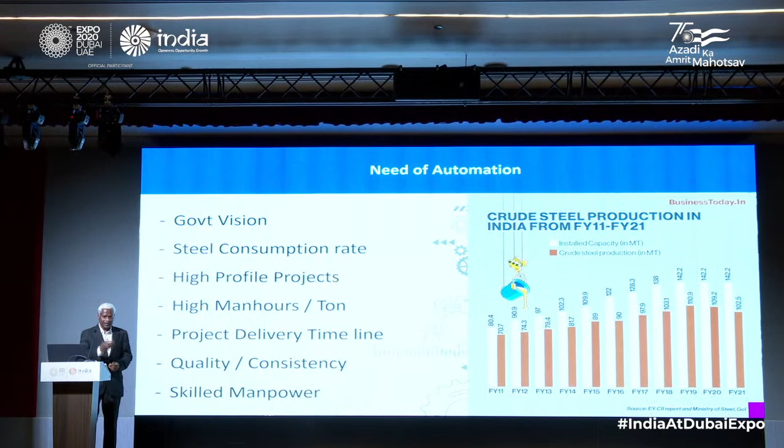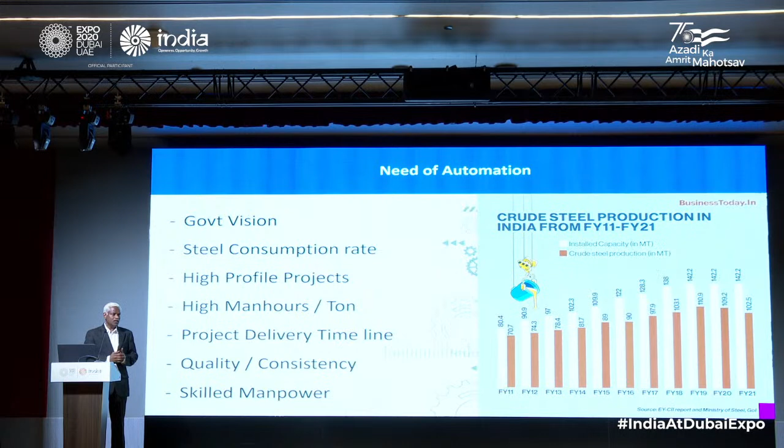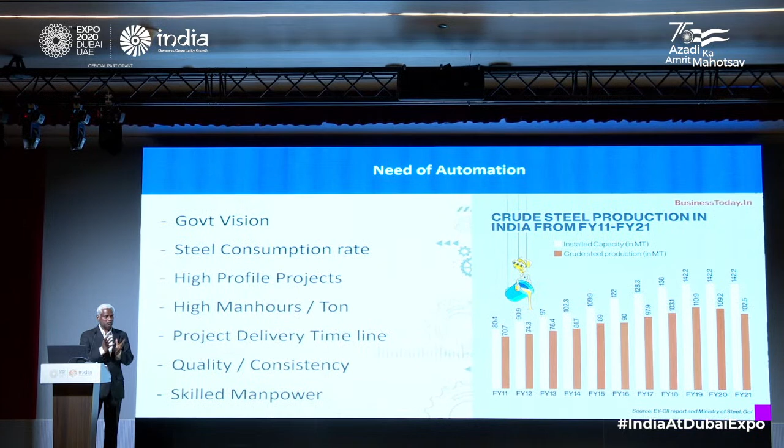As far as the need of automation for the steel fabrication industry in India is concerned, the first thing which comes to mind is what Sri V.R. Sarma mentioned in detail about the trend of the steel fabrication industry in India. We are going towards bigger growth, and we need a lot of value addition and energy conservative programs, which will help us in development.

The first thing is the government vision. Right now we are talking about a current GDP of around 2.85 trillion dollars, and by 2025 we are targeting 5.5 trillion dollars, with a GDP target of 8.4 trillion by 2030. This is an ambitious goal set by our central government.

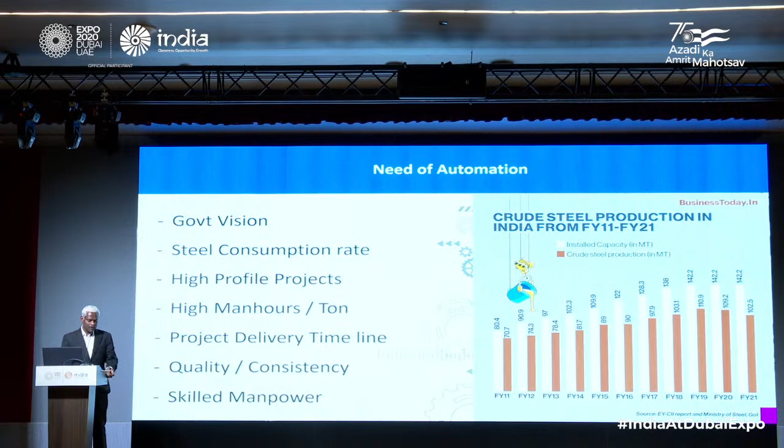To reach this ambitious goal, the steel industry is going to be a major contributor, like a main pillar of major infrastructure projects.

As far as the steel fabrication industry and steel production in India is concerned, the current consumption rate is around 118 million tons per annum, based on 2021-2022 statistics. We are expected to reach a target of 300 million tons by the year 2030, which means we need to more than 1.5 times the production capacity. So this is one of the cases for the need of automation.

In India, we are right now undertaking a lot of high profile projects. As you might have noticed during the recent budget, the Indian Union government has introduced a lot of big projects, which is a big scope for the steel fabrication industry - highways, bridges, railway projects. I can even take the example of the bullet train. If you consider the bullet train project itself, between two stations we are talking about a steel volume of 20,000 metric tons involved.

We are talking about 14 stations between Ahmedabad and Mumbai - that's just one single project. Likewise, there are several other major high profile projects that are going to contribute to the GDP of 8.5 trillion by 2030 and 300 million tons of steel by 2030. Considering these high profile projects, we are talking about hundreds of thousands of steel fabrication activities going to be involved in India in the coming years. So that was one of the reasons we need to look into automation.

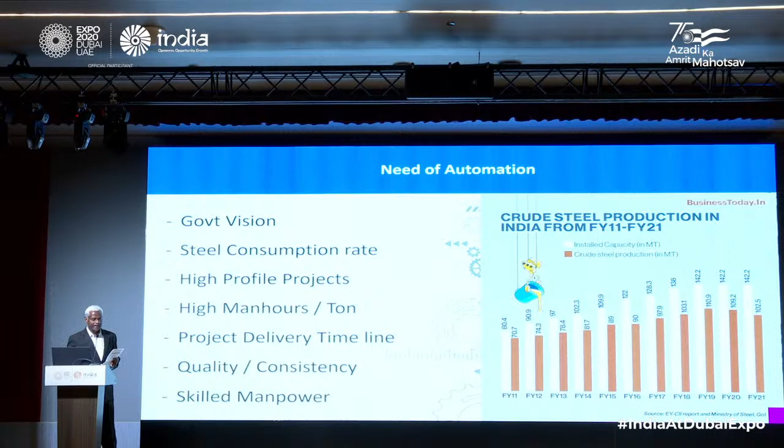For these reasons, I propose that we need automation in place so it can eliminate human involvement, fix human errors, increase quality, increase production rate, and reduce lead time.

The next thing I want to discuss is the current state of automation in India and the opportunity for investment from investors in UAE as well as India. Based on my recent conversations with friends and project managers from reputed construction companies, the current level of automation is very low compared to developed countries, which means there's still a big scope. As far as fabrication is concerned, we can invite the whole world to invest in automation in India, which is a big opportunity.

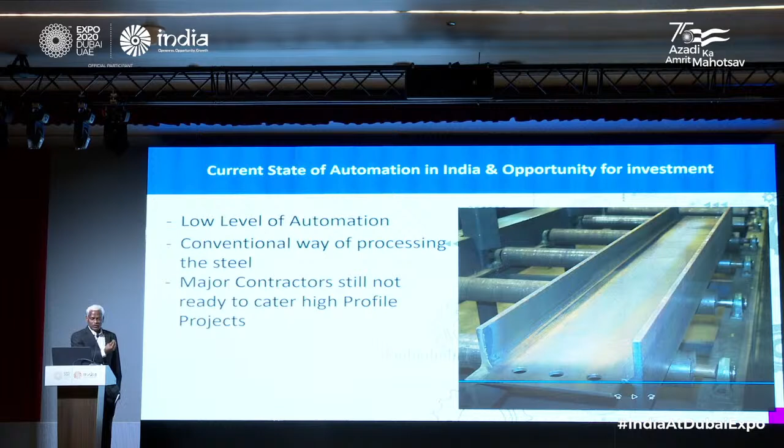To process this one single beam the conventional way, even with a magnetic drill and manual coping, it's going to take a couple of hours, maybe 120 minutes. The same thing, if automated through a single process, single stage machine, we could execute it in less than 5 minutes. You can see the difference: 5 minutes versus 120 minutes. That's a huge difference, and this is what developed countries are following today.

So let's see the automation solutions. We cannot single-handedly figure out one single item. We need to see automation as a wholesome approach. It's supposed to start from the concept, to the engineering, to the procurement, to the fabrication, logistics, installation, and we should also give a thought about the overall management of the project.

When I say engineering, right now if I'm talking about producing 1,000 tons of steel, we may need to pass through thousands of drawings. Right now we may be developing a drawing using AutoCAD, and then it goes through a PDF or a printed page, and it goes to the fabricators. Which means each time we need to cross-reference several detailed documentation before sending to the machine. Again, we need to create a separate part program to send to the machine to prefabricate the material.

Through using 3D modeling and CAD/CAM software and the flexibility of this software, we could create the fabrication drawing, detailing drawing from the 3D model easily and send to the fabricators. Also to the machine, we can directly import the drawing files from the 3D models, whether it's Tekla or any other 3D model. We can send directly from the 3D model to the machines. The machine has the capability to read the drawings from the 3D models and execute the job, which means we are completely avoiding human intervention in between the process, which means we are avoiding human error.

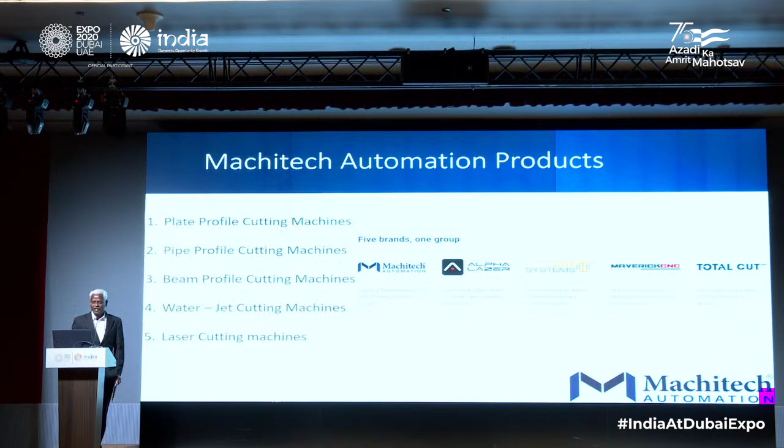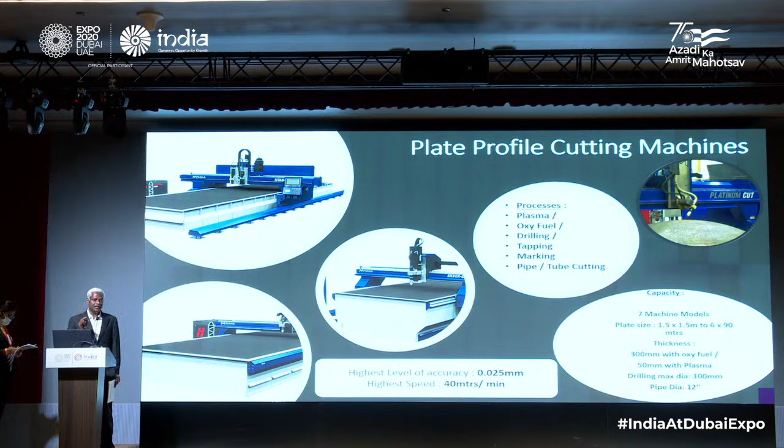The first one I want to briefly touch upon is the plate profile cutting machine. We have a complete range starting from 1.5 meter by 1.5 meter, up to a size like 6 meter by 90 meters, and even customized sizes. These machines are available for processes like plasma, oxyfuel, drilling, tapping, marking, as well as pipe and tube cutting. We achieve an accuracy of 0.025 mm at the highest speed of 40 meters per minute, making these highly advanced machines in the industry today.

The next one is the pipe profile cutting machine. These process circular pipes up to a diameter of 48 inches, for lengths of 6 or 12 meters, and even customized sizes. These machines are available with plasma, oxyfuel, and marking processes. Again, the accuracy level is 0.025 mm at a speed of 40 meters per minute.

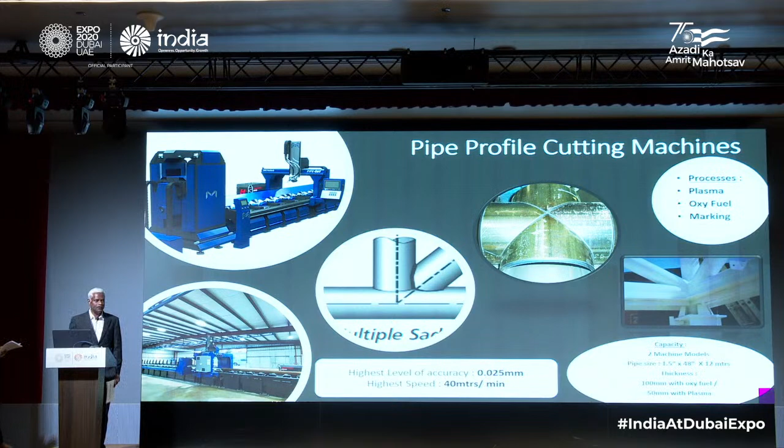The next one is the robotic beam profile cutting machine. With this single machine, we can process multiple materials like beam, square tube, rectangular tube, angles, channels, circular pipes, flat bar, and bulb bar. This machine in reality replaces several conventional machines like drilling, bandsaw, angle line, plate processing, and marking machines. So instead of 5-6 machines, we use one single machine which completely automates the whole process.

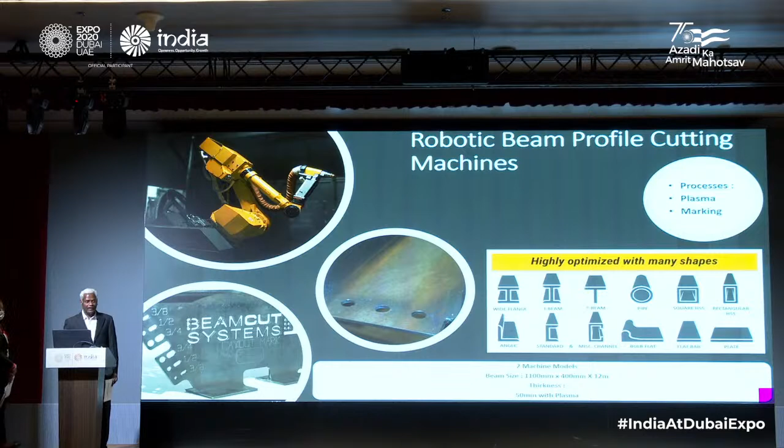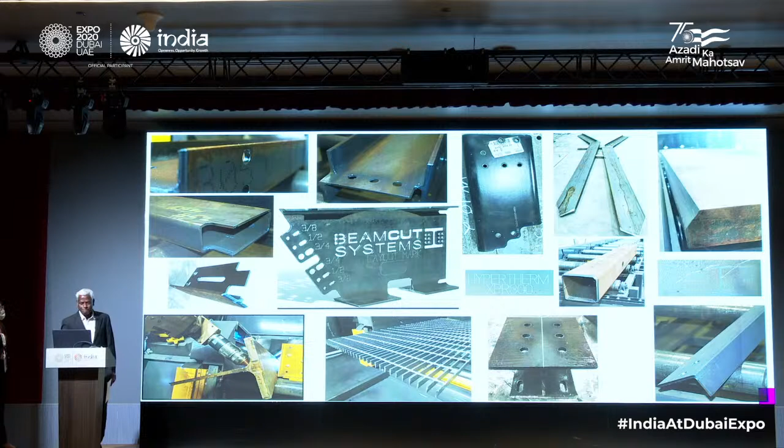So the next slide shows all these operations being done by one single machine, covering different materials. The next machine is the laser cutting machine. We have 4 different models for sheets as well as for rectangular, square, and circular tubes and pipes.

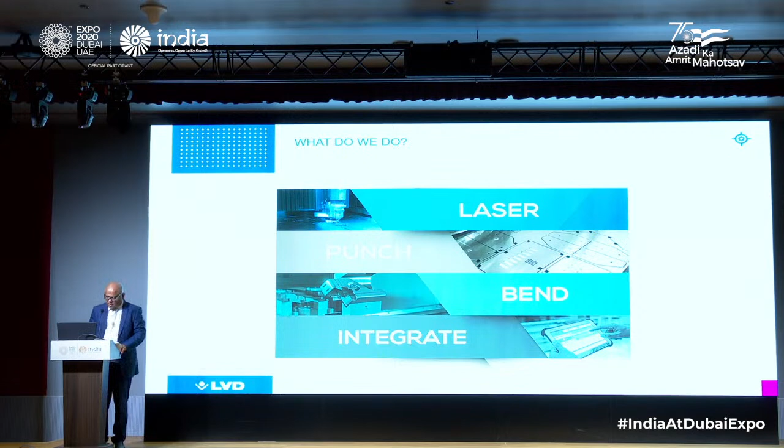First product is our laser cutting machine. I won't explain in big detail because in the last seminar I explained the products we have in laser. But as Mr. Sharma emphasized, the time is coming for the tube, so with the time shortage I have not included the tube laser technology here, but I'd like to inform Mr. Sharma and the audience that LVD is the first company in the league who has introduced the tube laser cutting machine with various capacities and thicknesses.

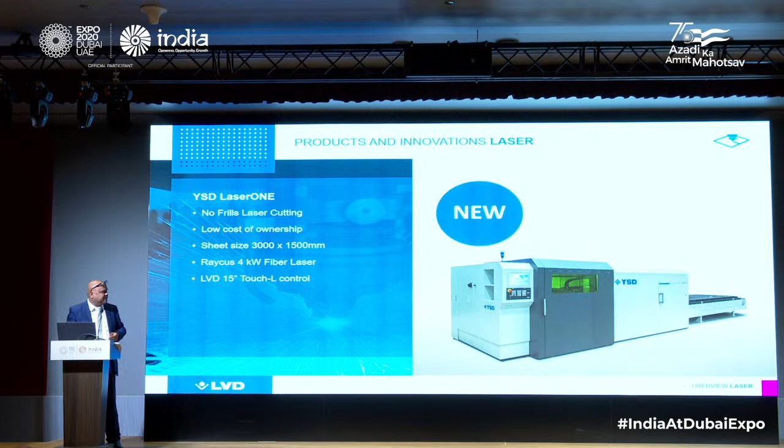We have machines up to 2 kilowatt where we can process tubes about 6mm in thickness. The YSD laser one is our entry level machine, a 3 meter by 1.5 meter machine with 3 kilowatt and 4 kilowatt capacity. And then we have the Taurus machine.

The Taurus is a large format laser machine with not only 2D cutting - we have a facility for bevel cutting in the laser cutting machine, and this is the first machine of its kind that can be built for processing 40 meters in length with a 3 meter wide table.

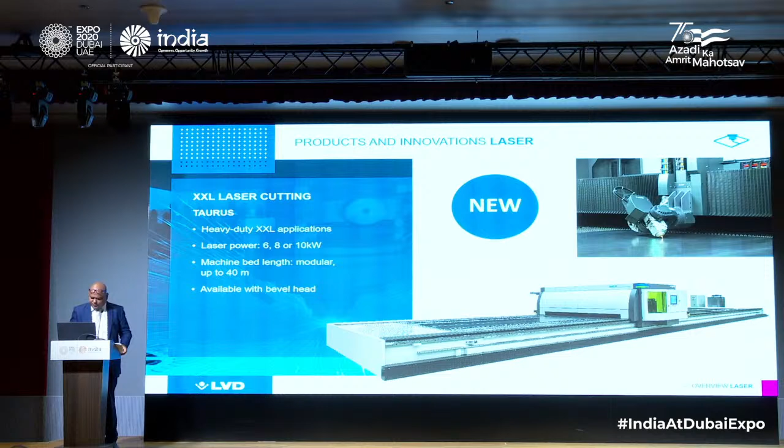After the laser, I'd like to introduce a bit about the punching capacity and technology of LVD. We have a machine called PX, and it's not just a punch press - the punch which can form, which can tap, and which can bend, all in one machine with T-style tooling.

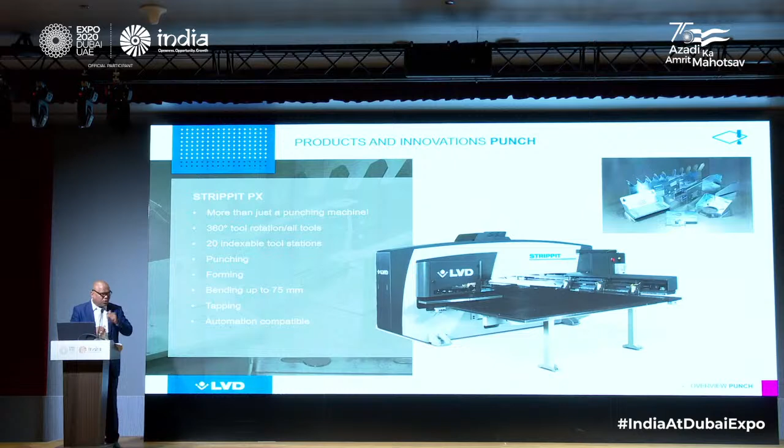The latest in the fleet is the combination of laser and punching, the series called Strippit PL. The Strippit PL punch laser offers two technologies in one machine. It eliminates processes, reduces production time and material handling, and lowers the cost per part. Automation adds the next level of productivity.

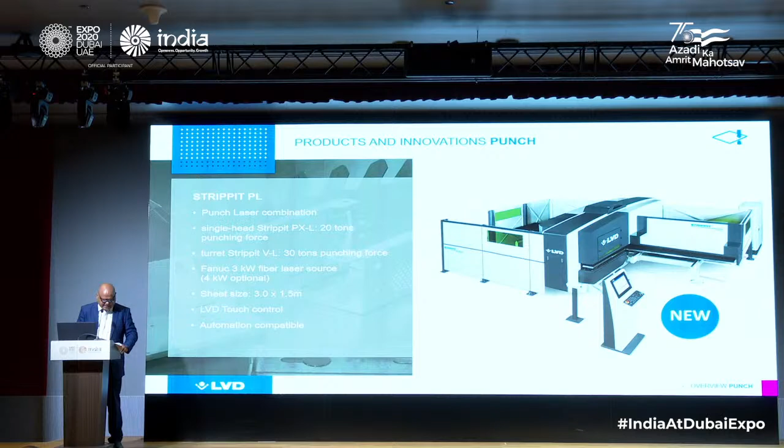Apart from punching and laser, LVD has got big expertise in bending machines, and since we are a 70 year old company, we have very vast experience in producing bending machines. And when it comes to bending, Ultiform...

Ultiform takes LVD's 10 by 10 rule for bending to the next level - art to part in just 20 minutes. Ultiform can process complex parts up to 800mm by 1200mm and 15 kgs in weight, in various batch sizes.

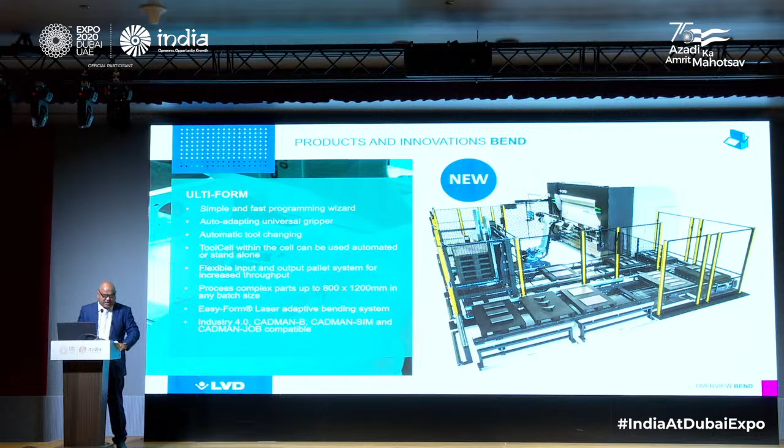After laser, punching and bending, there is a high requirement to integrate all these machines by software, and we call it the Cadman Suite. It's all about the process flow. Naturally, LVD Cadman solutions are complete in tune with Industry 4.0, quick response manufacturing and smart factories, and in some cases are ahead of the curve when it comes to fully optimized workflow for small to medium sized batches.

So this is in brief about the products, and finally what makes LVD a global company. LVD is a global company present in over 47 countries around the world with over 1,000 employees. Wherever you are, we are near to you. The 47th country, our new subsidiary, is Vietnam.

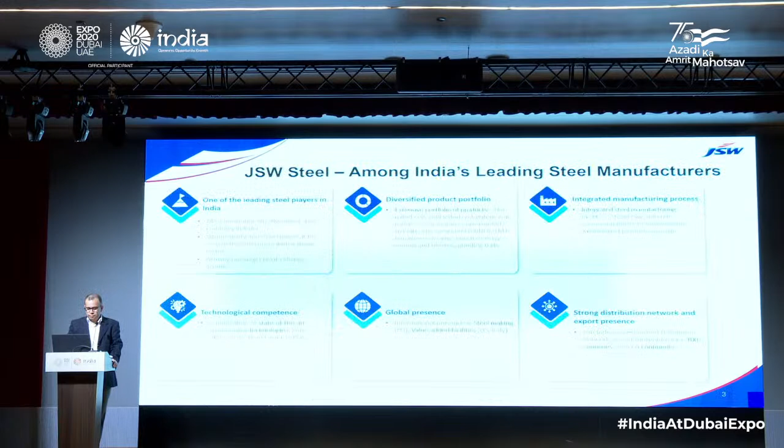These are some of the plants. Our plants are located across India. We have a few plants outside also - one is in Italy, Piombino, and the other one is in Baytown, where we have a plate and pipe mill.

Few of our products are as below. We produce hot rolled, coated, color coated, tin plate, cold rolled, electrical steel. The applications vary as per the product. Now coming to hot rolled, the main thing which is used in steel fabrication is our hot roll.

If we talk about India, India is the second largest producer as well as consumer of steel. The per capita consumption of steel is approximately 75 kg in India, whereas it is one third of what is globally used. If we compare UAE and India, the ratio is like 1:10. For every 75 kg of steel consumed in India, UAE approximately consumes 800 kilos. So we are far behind.

With respect to jobs, in India, because of the steel industry, there are 0.5 million direct jobs and 2 million indirect jobs.

Now, if we look at the forecast and see the sectorial distribution of UAE and India for the next 30 years, for infra and construction, UAE is going to consume 92% of the steel that is imported or produced there. For India, it's going to be approximately 65%. In UAE, the general engineering consumption is going to be approximately 3%, and in India, it's going to be approximately 25%.

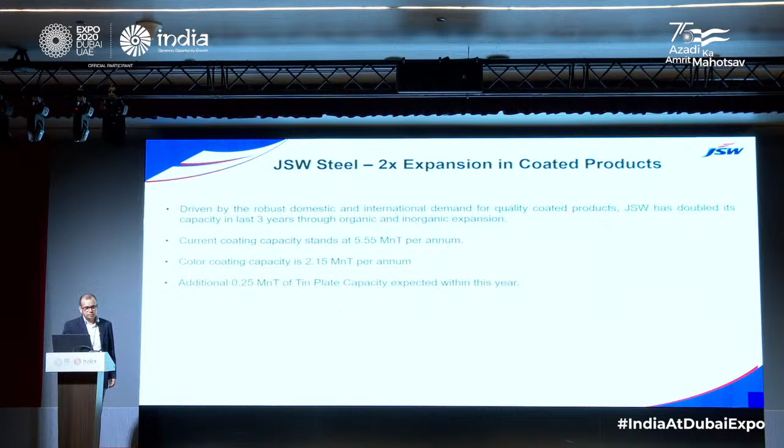As we talk about fabrication, it is not only for buildings, but for us it is like the small manufacturers, duct manufacturers in UAE who do cutting, bending, shearing. So it is the ideas which come from their side, on basis of which we design different grades or products. These are some of the few products designed in Q3 of financial year 22.

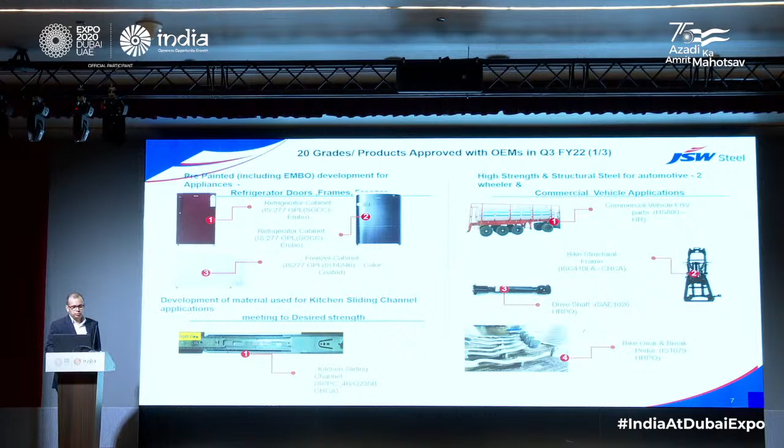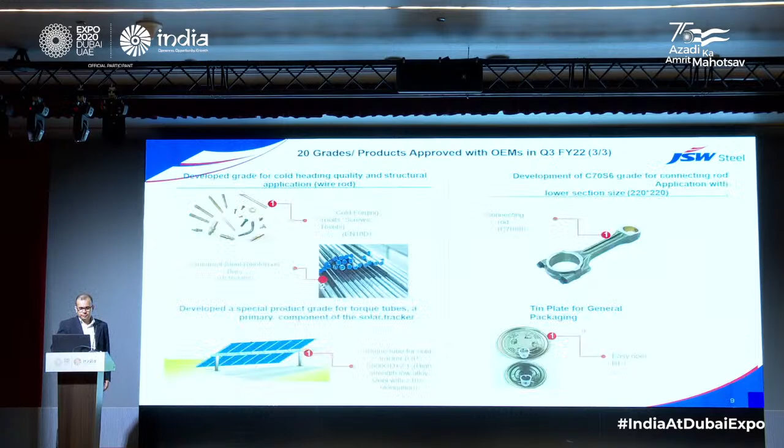There was a solar panel structural support also which was done. There was generator core which was developed, crankshaft rod, connecting rod, and these are the few key industries which we are serving in the Middle East.

PEB, HVAC, wherein the material goes for ducting, dampers and all. Pipe and tube manufacturers, we are giving material to the re-rollers for galvanized and color coating. Drum and barrel manufacturers, wherein they produce paint, lubricants, oils, and for can manufacturing, that is specifically our tin plate.

That's it. Thank you.